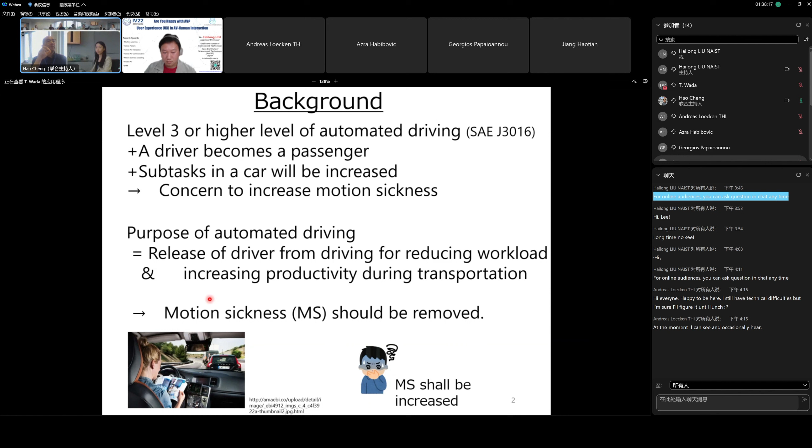Around 7 years ago or something, many researchers started to mention their concern. The first one, the pioneering work, Diels and Bos investigated and organized all causes of motion sickness in the context of AD, for example, sitting backward and the use of IT devices, etc. And also they proposed design guidelines for comfortable and productive AVs.

And also Sivak of the University of Michigan conducted a questionnaire. They asked what kind of activity do you want to do when the automated vehicle will be available. And based on the result, they estimated the possibility of increased motion sickness. And also, it's kind of an advertisement from my side, I also pointed out this one, emphasizing the importance of the vehicle control aspect concerning motion sickness. So I want to introduce this in today's talk.

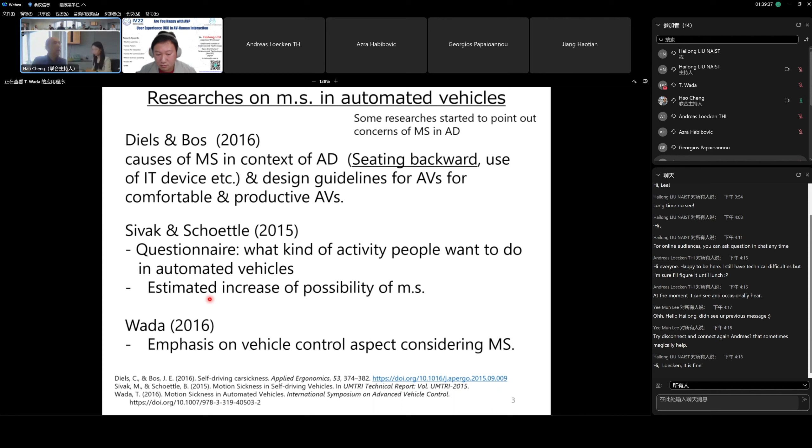Okay, so the quantification of motion sickness is very important. That is the point today. Much effort has been done so far. The first one is questionnaires to ask the severity of motion sickness. The second one is biosignal measurement. And the third one is computational models. So I focus on the third one.

Very roughly speaking, we have two kinds of models of motion sickness. The first one is fitting models to describe the input-output relationship, I mean, to describe experimental results, like the ISO standard, MSDV or something. And the second one is models based on hypotheses of the mechanism of motion sickness, which include sensory conflict theory and subjective vertical conflict theory. This is a kind of branch of sensory conflict theory. So today, I want to focus on the second one. Okay, so this is the main body of my talk.

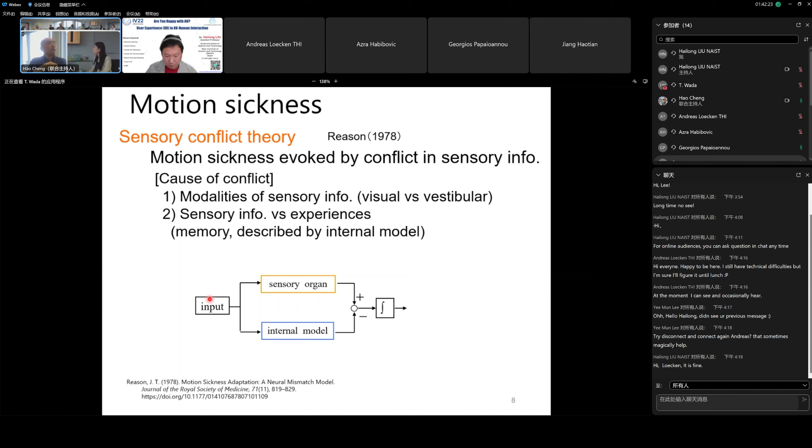Okay. So let me think about what a conflict is. What is the definition of conflict in sensory conflict theory? That is a very difficult question. How can we define it, especially when multiple sources of signal exist?

So as far as I know, there is no theory that deals with the definition of conflict. The only exception is this one, subjective vertical conflict theory, in which the conflict is defined by the discrepancy between the vertical direction sensed by our sensory organs and the one estimated by experiences formed by the internal model. This is, as I mentioned before, sort of built in the central nervous system.

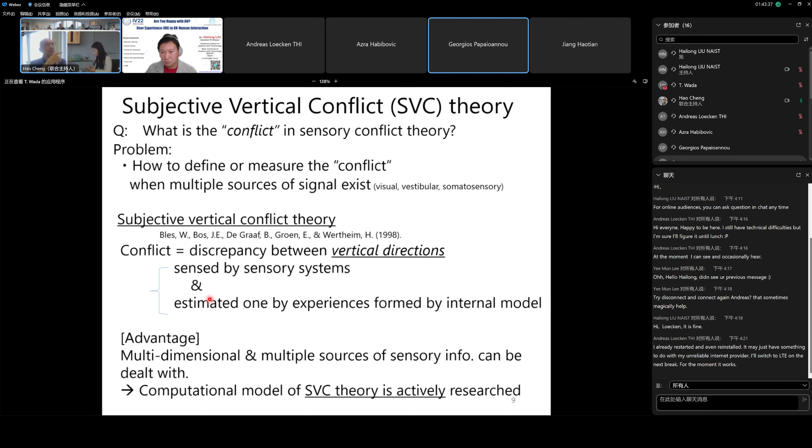So the big advantage of this theory is that multidimensional and multi-source sensory information can be dealt with. Therefore, the computational model of the SVC theory is actively researched nowadays. And I'm a big fan of this theory, so that's why I'm looking at this theory.

My pointer has not moved. Yeah.

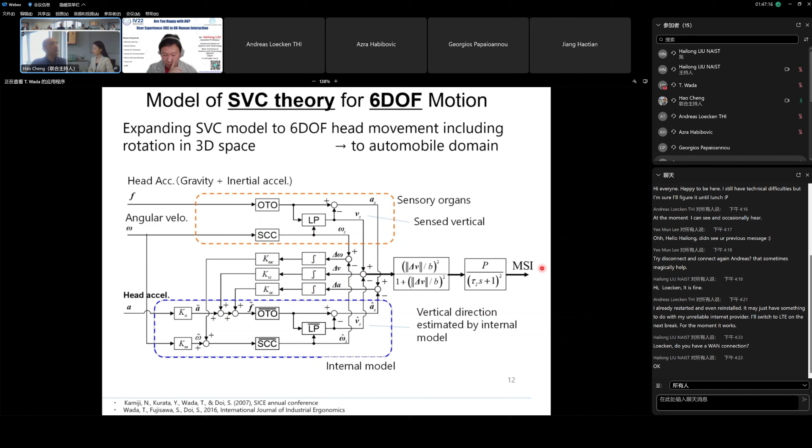Okay, so we validated our model by comparing with experimental results. The right-hand side is measured motion sickness incidence. They shook 100 students for 2 hours, and they counted how many people vomited, in 1976, but it's very important research. The left-hand side shows the predicted MSI using our model. You can see that our model fits the experimental result very well.

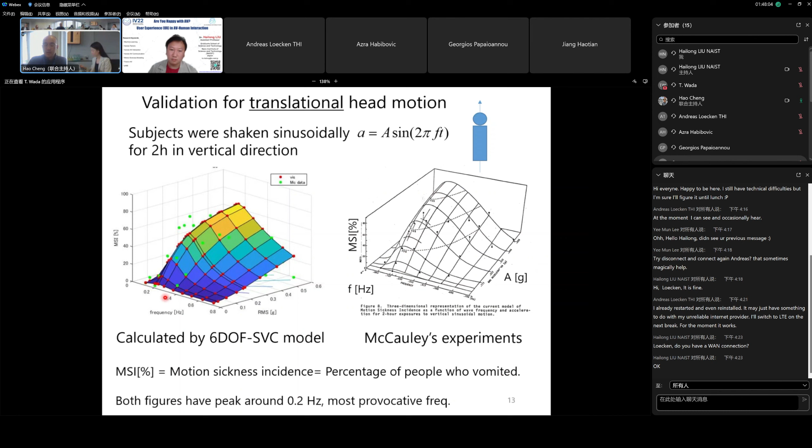And here, both figures peak around 0.2 hertz. That is known as the most provocative frequency. Okay. And now that I have a model, we have applied it to many applications, including analysis of head tilt strategy of the driver. And another one is this kind of personal mobility system: the effect of the tilt function of PMS on motion sickness.

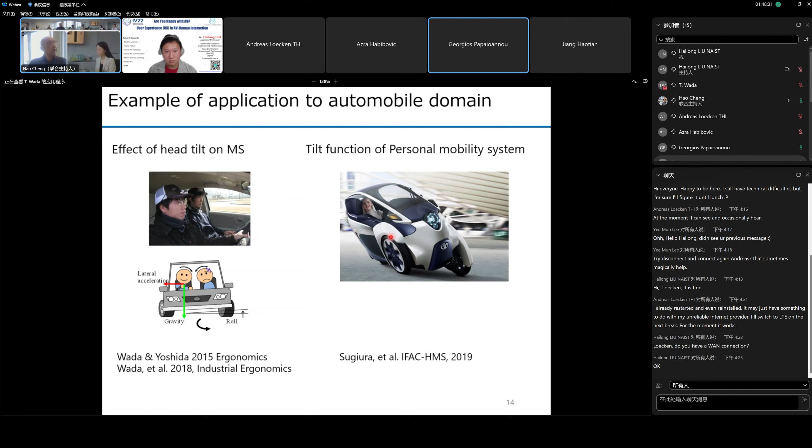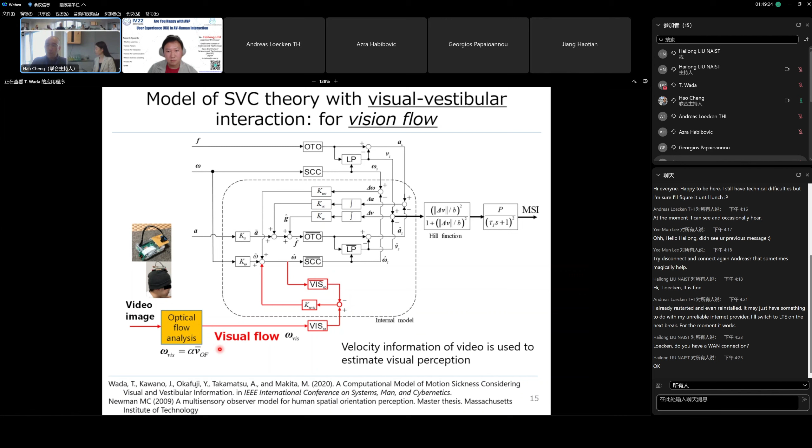But if we want to predict the motion sickness by using the experimental data, we need to estimate that signal in some way. So we use the camera image to predict the visual flow by using a very simple optical flow analysis. I'm omitting detail, but we conducted very small experiments. Participants were exposed to stop-and-go driving in the navigator seat while either looking forward or watching a laptop PC.

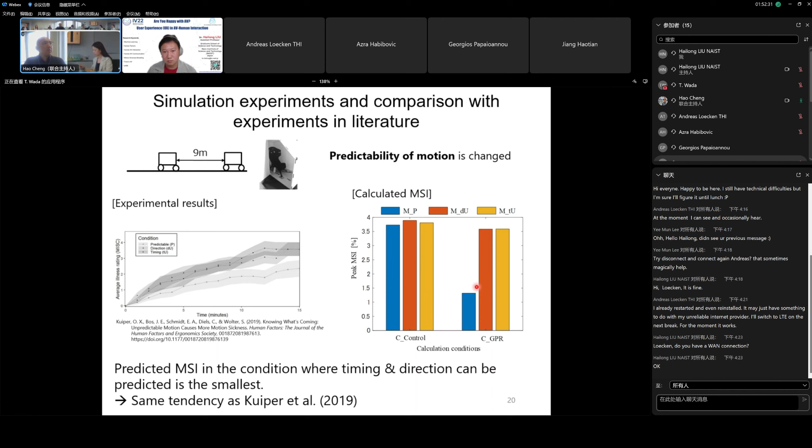Yes, this one. I'm omitting detail, but the predicted MSI in the condition where both timing and direction can be predicted, motion sickness is smallest. So it shows the same tendency as the experimental data.

Okay, so let's get into the final stage, potential application of the motion sickness model to automated driving. This slide shows what kind of effort we can make to reduce motion sickness by using a model. For example, motion control, vehicle design, and in-vehicle devices, etc. Motion control includes motion planning, vehicle control, suspension system, lean control, and so on.

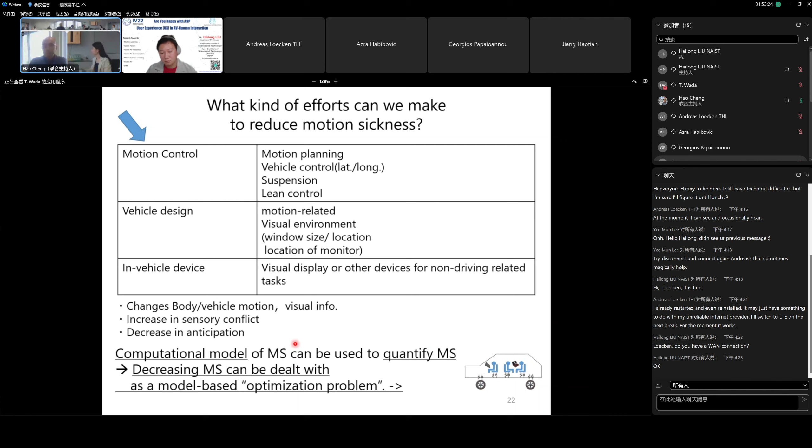A computational model of motion sickness can be used to quantify motion sickness, which means that decreasing motion sickness can be dealt with as a model-based optimization problem, because now we have a model. This is very similar to the slide that I showed you in the very early stage of my presentation. Motion sickness should be explicitly considered in automated driving, and now we have a model, so we can use that.

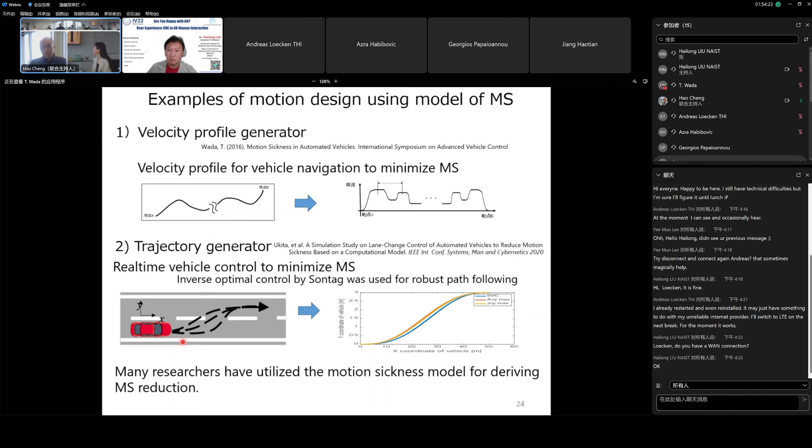I'll just show you very small examples of research we conducted. The first one is a velocity profile generator for automated driving. Another one is a trajectory generator, including control theory. Also, many researchers have utilized the motion sickness model for deriving strategies to reduce motion sickness. I believe that you will find some research topics in many symposiums this year.

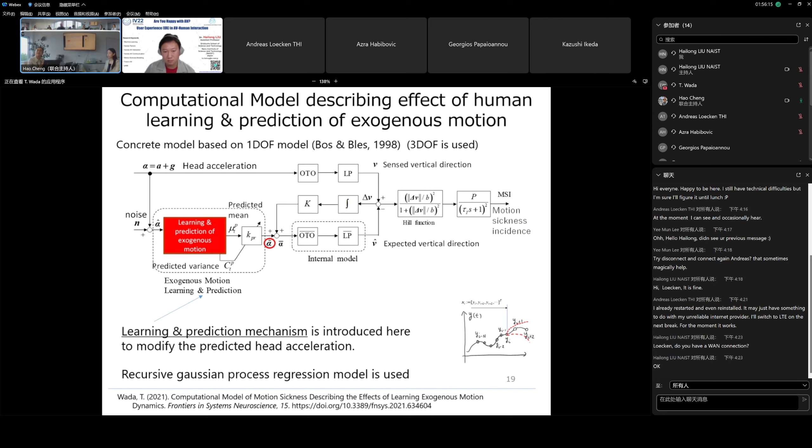If there's no question from the participants, I would like to ask a question about the motion sickness. But I'm not an expert in this area; I just started to read the articles several weeks ago. I'm curious because I know motion sickness is related to age. At a young age, children maybe have more motion sickness than adults. How do you build a model regarding different ages, or how do you find a solution to the motion sickness problem with respect to people of different ages? Yeah, this is my easy question.

No, not easy. I think it's a very important question, because we should be aware that there are many models. But as you said, the output of the model is motion sickness incidence, which means it's a kind of group-level model: how many people vomit, the percentage who vomit. That means our model does not have the ability to describe motion sickness in an individual. So first of all, we need to change the output of the model.

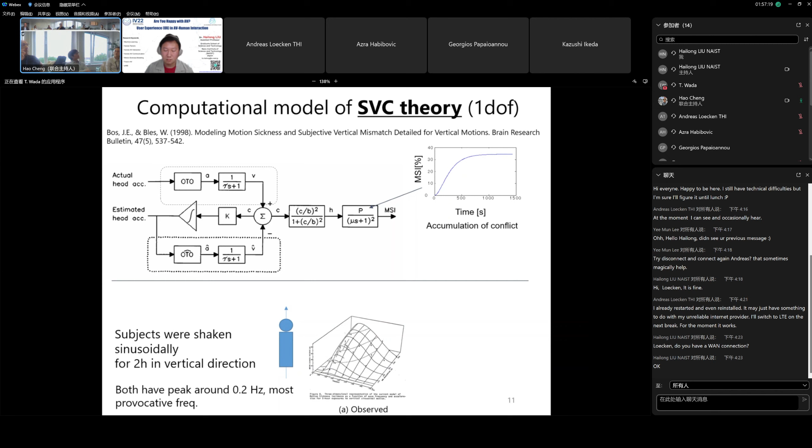Now several research groups, including us, are tackling this problem. As I mentioned, here, nowadays the most trustable method to measure motion sickness is a questionnaire, for example the MISC scale or some other things. So we will change the output of the model to the questionnaire directly, not the percentage of people who vomit. Then we need to change the sensitivity. As you mentioned, there are huge individual differences in susceptibility to motion sickness, so we will tune the parameters of the model to fit the individual.

But it's very important and it is very difficult. Okay, so it needs loads of people, a lot of data to build a model, like different groups of people in different ages. Yeah, and also the important thing is if we want an individual model, we need to conduct experiments many times per person to identify the parameters of the model. That is a very big challenge for us. Okay, thank you.

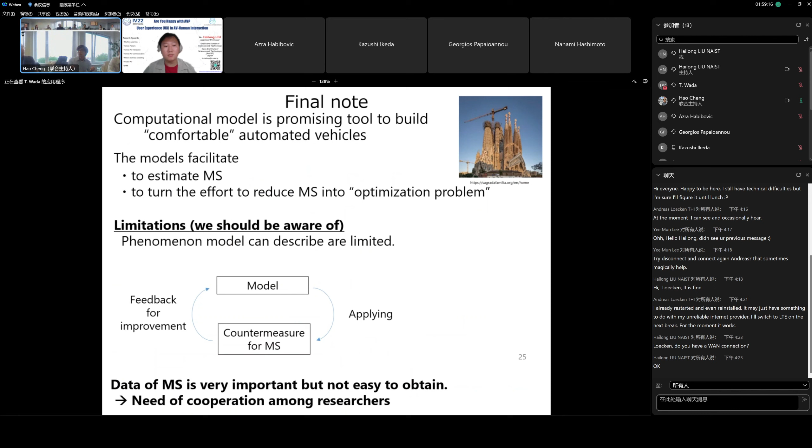Maybe I ask a short question. As you mentioned in the last part of your presentation, the data is quite difficult to acquire, I would assume. So based on the research you presented, could you tell us how difficult it is to get reliable data, and also the quantity of data? How can you determine how many participants you need when you want to do some calculation based on that?

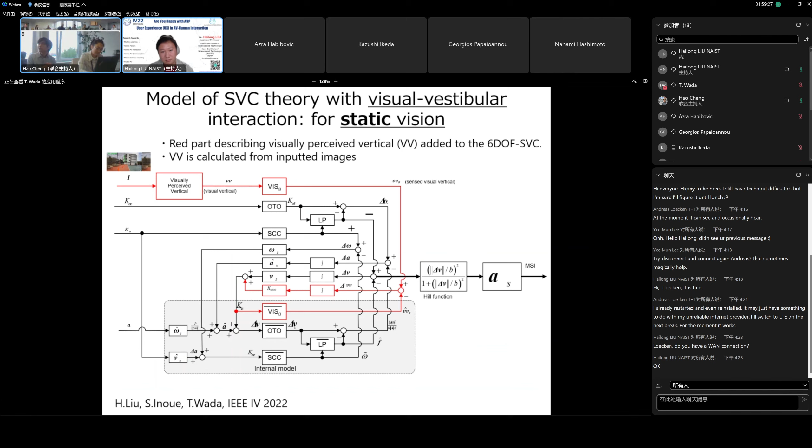I think Professor Liu will answer some of your question in the next presentation. But we need to take care of many things to get trustable, reliable data, because motion sickness is affected by many factors: temperature, how much alcohol they took the last night, or something like this. So first of all, in scientific research, we fix the conditions as much as possible. That is a very important thing. Okay, thank you.